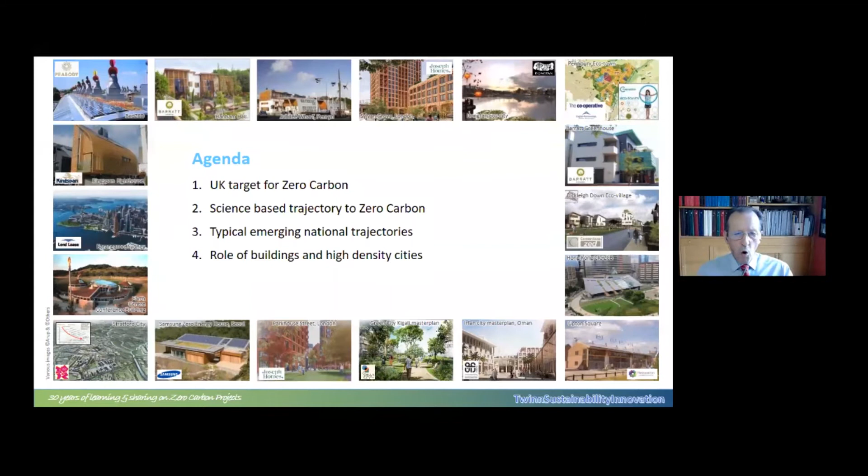So my background, it's 25 years since I started my first zero carbon buildings, and I've been involved ever since in various different kinds of zero carbon, and beginning more to look at embodied energy as well as operational energy. But for now, I'm going to be talking about the UK's trajectory, a science-based approach to how to get to zero carbon, looking at the sorts of policies which we've had to introduce, because it isn't just energy use, and then to focus on the role of buildings and high density cities, because there are many similarities between the likes of London and, for example, Hong Kong, but some very interesting subtle differences as well.

A lot of the work in the UK has been headlined by the Climate Change Committee, which is set up by government as an independent arm of government to look at scenarios as to how we reduce carbon emissions and make recommendations for policy. And the law is such that the government of the day has to formally respond to the Committee on Climate Change proposals. We have recently had what is called the 6th budget.

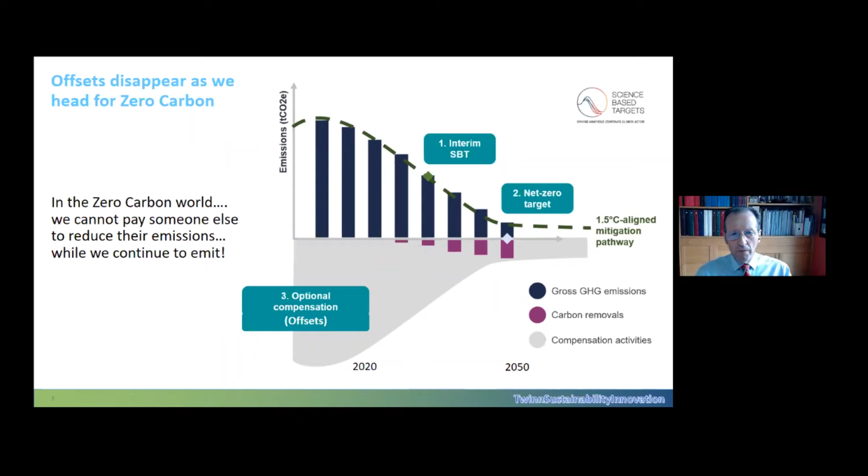And indeed, as every country starts to go zero carbon, they will be using their own sequestration towards their own targets. So at the moment, you find airlines offsetting their carbon because they're growing forests somewhere in a different country. But in reality, that country, when it goes zero carbon, will be looking at that carbon sequestration contribution towards their targets. So avoiding double accounting means we will lose offsets as we go towards zero carbon. We might be able to use them in the short term, but they will taper very quickly.

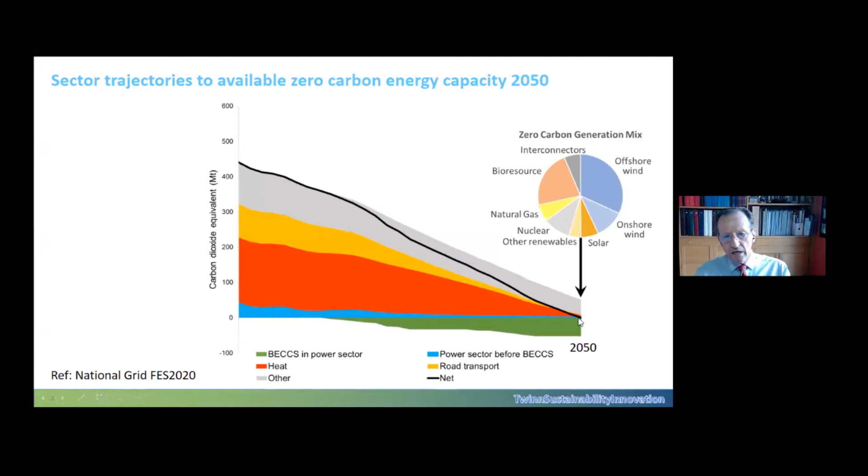We have an element of sequestration here, which offsets some of our grid production, particularly at peak. This is to be grown trees in the UK, so we're expanding our vegetation and looking at harvesting it and then locking in the carbon from emissions of combusting that. So we get a double benefit, and we'll probably for the next 50 years bury carbon emissions into old North Sea oil geology, which is currently now vacant. But you can see buildings, particularly in heat terms, and a lot of our electrical demand in the grey will need to curtail greatly by the time we get to 2050.

Large windows may give good daylight, but that does not end up in low energy use, particularly in lighting terms. We tend to find it gets very bright at the perimeter, and then it makes the interior look dark and gloomy. So we're finding that in reality, what happens is not what the modeling has in the past suggested. And our regulations are beginning to now have to change to try and address the fact that these buildings are gas guzzlers.

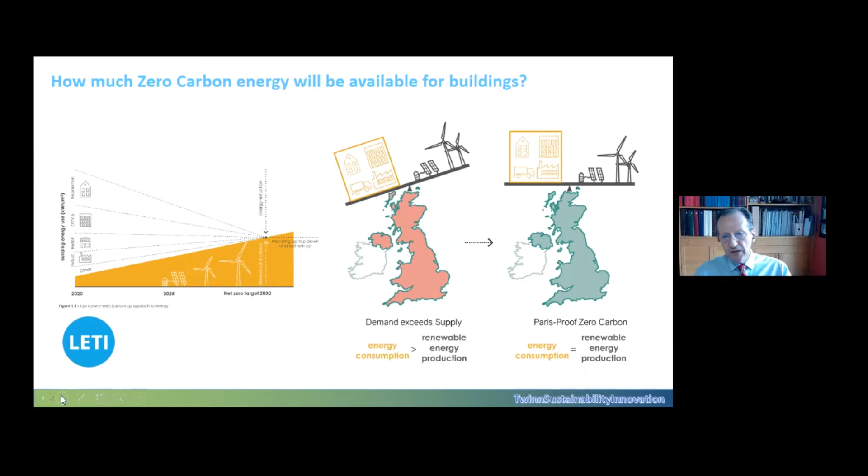RIBA is another of these organizations, so the Royal Institute of British Architects, which has been taking a lead, saying we're aiming for 2050, but actually for new build, we need to be looking at far shorter timescales, because we have a lot of existing building stock, which is the challenge in future. New build, we need to be focusing on zero carbon very quickly. And they have been setting targets, working with others, including LETI, including some of the supply side of the industry.

And we're now getting to the point where, for example, British Land, as one of our major developers in London, are saying all their future developments will be net zero carbon at completion. And this is because we're beginning to learn how we can do it, but also how we can reduce demand far faster than we have done in the past. And here are the sorts of trajectories we're looking at. And this isn't just prediction, this is measurement.

There's draft building regulations now being prepared and consultation completed, which are talking about introducing the first stage of you have to measure what your building is aiming to, its energy use, and publish it, so that you can then compare the predictions against the end result. Because to date, other than public buildings, most buildings never had to produce a certificate.

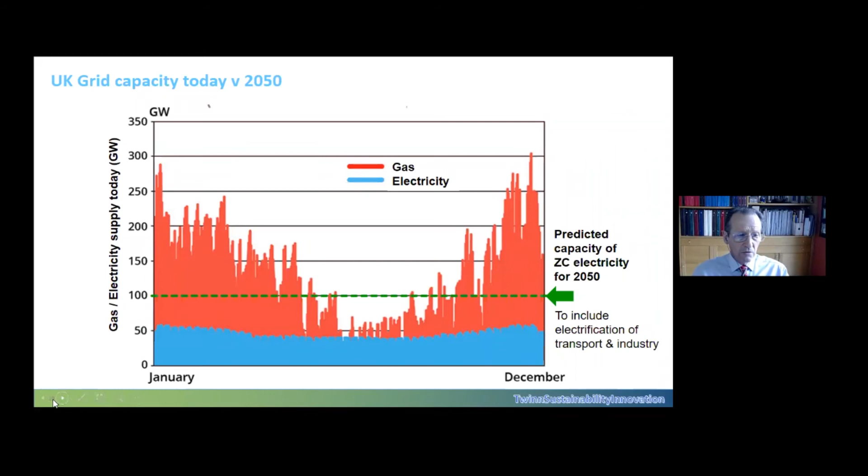Data disclosure is then the final part of this equation. Just because those big glass buildings in London got a compliance, yes, you satisfy the building regulations and here's the modeling, we found that that doesn't work. And this is where data disclosure becomes a critical part of the way forward. We have to be able to model more accurately. And the only way to model more accurately is to reconcile against the measured results of that construction before and after, and make sure the feedback goes back into the modeling.

And what we've tended to find, we've been far too optimistic in the modeling as to how efficiently things work, how systems, control systems work. Most of them don't work as intended, all of those things. And I think you'll hear a lot more in some of the subsequent lectures about disclosure, monitoring. Those landowners who have gone in and measured properly get a very different result when they then start to look at how they modify the operation of their buildings.

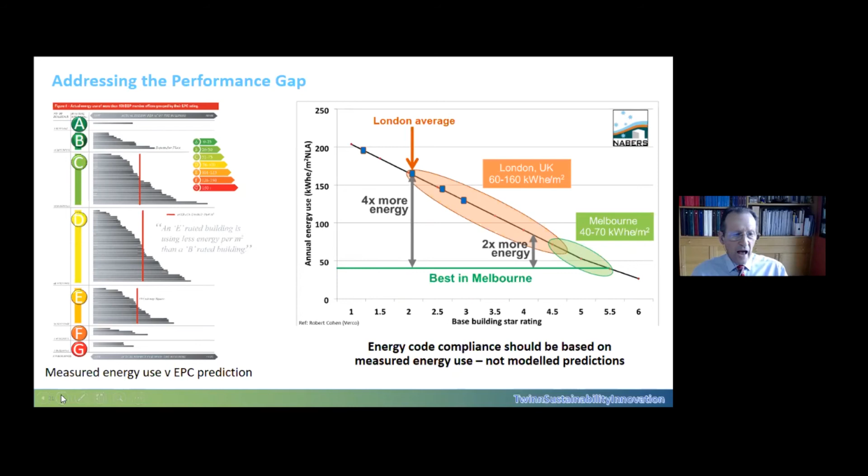On the right, we have feedback from, as I mentioned, NABERS in Australia, where the best in Melbourne of an office building with roughly the same climate as London is using a quarter of the energy that London's average is. In other words, we're using 4 times the best in Melbourne, and certainly more than twice the best in London compared with the best in Melbourne. These we have to learn from and accept, and then change the way we do things.

So what does this mean for building designs? I'm going to finish with a whole set of case studies which are currently being designed, approved, and have started construction in London. But I'll give you an idea. This is the sort of thing we're looking at. On the left is a typical building, full height glazing, fan coil units, cooling load not far off 130 watts a square meter for your systems. We are now looking at far more modest windows, as I said.

We're also looking at the IT. What NABERS in Australia identified, and separate research here, is we are not using anything like the computing power that most of the codes assume we are. And indeed, there are actually advantages in the software of feeding in high tenant loads because it makes your solar loads look smaller. So we found these unintended consequences in the modeling.

But if you go through, we're finding that, for example, if we use the new European standard for lighting in workplaces and look at the task lighting option, so this is 300 or 400 lux on the desk for 1 square meter out of 8 or 10 square meters, and the background lighting is at 150 lux, we're then looking at lighting which is halved. As I mentioned, the small power, the computers, going down, the solar load dramatically lower. And by the way, the sun angle's lower in the UK, so in mid-season we get higher solar gains than arguably you will get within Hong Kong.

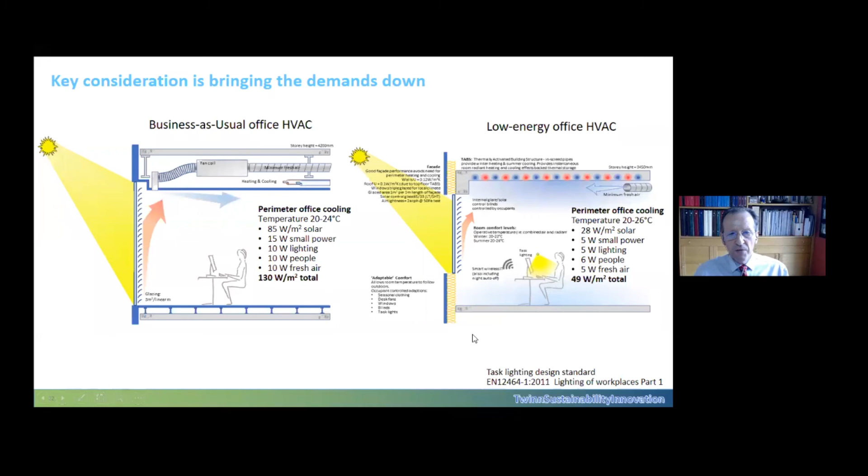We're also finding that we're getting rid of a lot of the kit. The costs of the building can come down. We're also finding the storey heights can come down because we haven't got these voids. We don't need the drop ceilings and so on, which tend to have very high embodied energy because they don't last that long. They certainly don't last the life of the aluminium, which a lot of them are made out of. And the cladding area has come down, so we can afford to put more investment into getting the shading and so on, right? So this is a little bit of a snapshot. It's not the only way of doing it, but it gives you an idea.

So a number of these little case study snapshots. This is a building going up near London Bridge; you can see the centre of the City of London there. The Thames is just going past between this building and those. So fairly large buildings, and we're looking at 55 kilowatt hours per meter squared, which is about 55% better than our current building regulations. And it's what we're calling Paris-proof zero carbon.

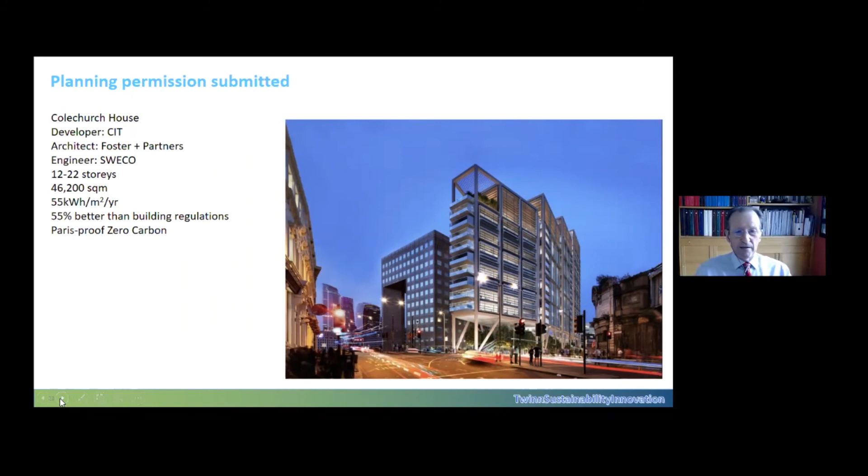In other words, if we can bring the loads right down to these levels, we know that as the grid decarbonizes, we will get to a point where the grid will have enough capacity to serve that building 100% with zero carbon electricity. And so we're looking ahead to where the grid is decarbonized, but of a limited capacity, and we are future proofing for that eventuality. This building, in fact, has a fair amount of PV on it, and it's used in the shading. It tends to be the more costly way of achieving these, but cities always seem to have a certain proportion of buildings where more money gets spent on them than others.

This is a more pragmatic approach. Underneath this is Southwark Tube Station, the underground. You all know only too well over-station developments, of which you in Hong Kong are experts. But this is a new building where once again you can see this number coming up, 55 kilowatt hours per meter squared, 17 storeys. This one's also doing 40% less embodied carbon. There's a fair amount of timber going into this building, structural timber, and they're reducing the amount of concrete going into the building.

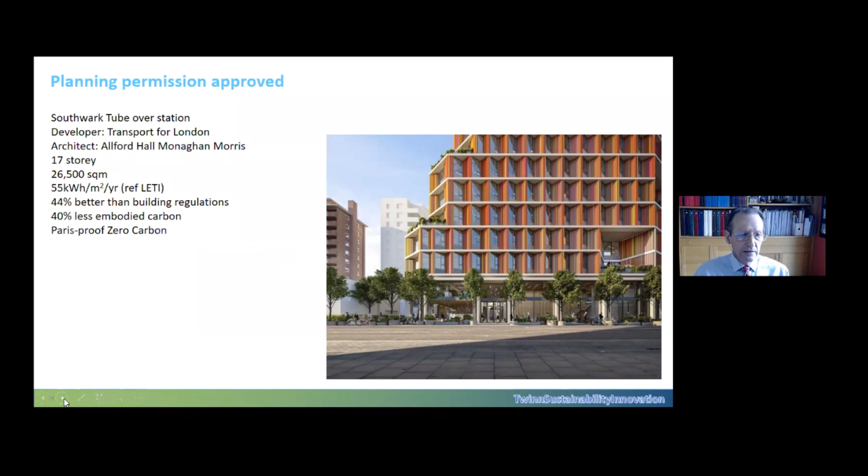This one, a 20-story tower, which had planning approval a year or so back. This one is 75% better than the building regulations. And this is going for 35 kilowatt hours per meter squared, including the tenants. And here is the sort of systems we're looking at inside the building.

We're looking at what used to be called in the 1980s a Versatemp condenser circuit system. That just means the temperature it's working at. And what we're looking at is temperatures in the water between 15 and 28. And we can then, when we're cooling an area, put heat back into the pipework. A heat pump can then heat that up to generate hot water. So you can often get a balance in your buildings.

And then the rooftop air source heat pumps do the topping up. And we're finding the north side of the building may need some heating and the cooling on the south side. And we're putting it via the concrete, so we've got that thermal inertia in the building. And we can then turn off that plant for the peak hours because there's 2 or 3 hours of thermal inertia within the building.

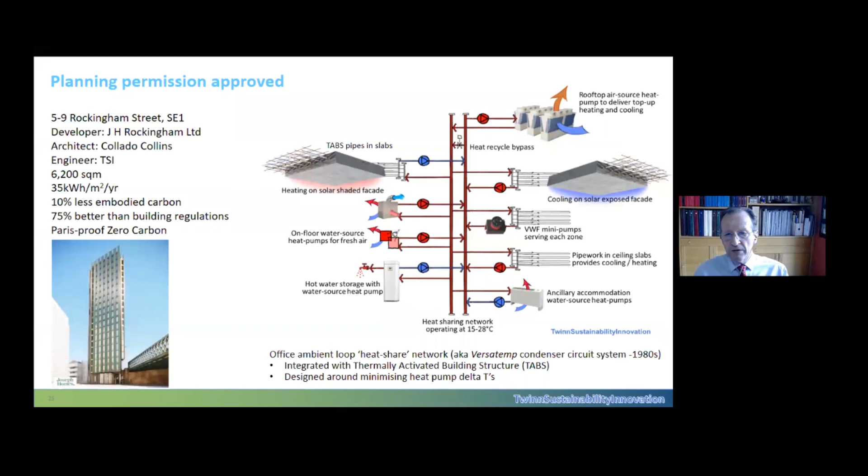This is another one. Here, once again, 75 kilowatts. They haven't got quite so far, but we're on this learning curve as developers begin to realize how far we can go. This one's particularly interesting, and I've included it because of its construction. It has changed fundamentally how we construct buildings.

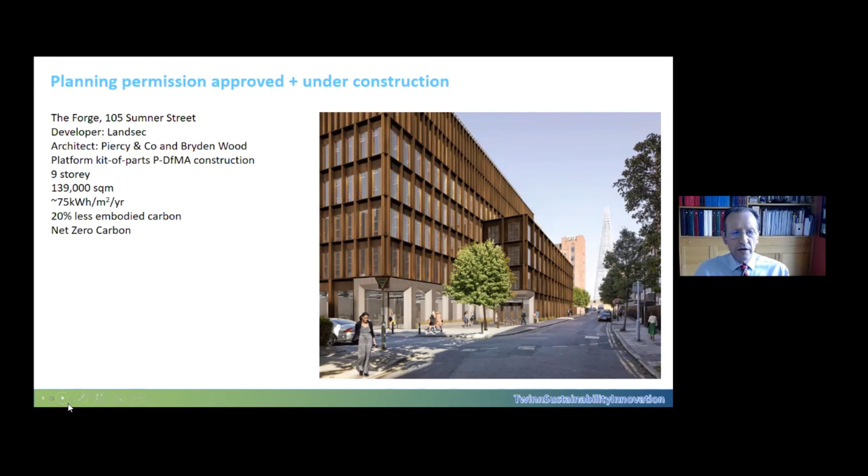So there's a lot less concrete going in on site. There's a steel frame with concrete poured simply into the permanent formwork, but all of it is kit parts so that you reduce the amount of material used and you reduce the embodied energy in the building. This one will be a very interesting building when we see it completed. It's now on site being assembled.

This is what we're also beginning to see. This is an existing building, which is now being totally refurbished and is going to be reclad. It's now going on to site. This is British Telecom's old headquarters, very close to St. Paul's, which is just to the right.

And the system has been completely reclad, but it reuses all the existing structure and therefore has a very low embodied energy. The targets they're looking at are not quite Paris proof for the whole building, but they're looking at Paris proof for the base build section, because some developers are not yet confident they can convince their occupants to lower their energy. And that's one of the things which has been very interesting about the shift to zero carbon the government made in the UK.

Psychologically, before that, when we were going to 80%, a lot of people thought, oh, well, I'll be in the 20%. I won't have to do much. Other people will do it. But what we found is once you say everybody has to do it, tenants are beginning to say, well, I need to do this because my funders and my supply chain are beginning to look. If I want staff, youngsters who were out on the streets complaining about climate change, the Extinction Rebellion, they are looking for companies which now have good credentials in carbon and energy terms.

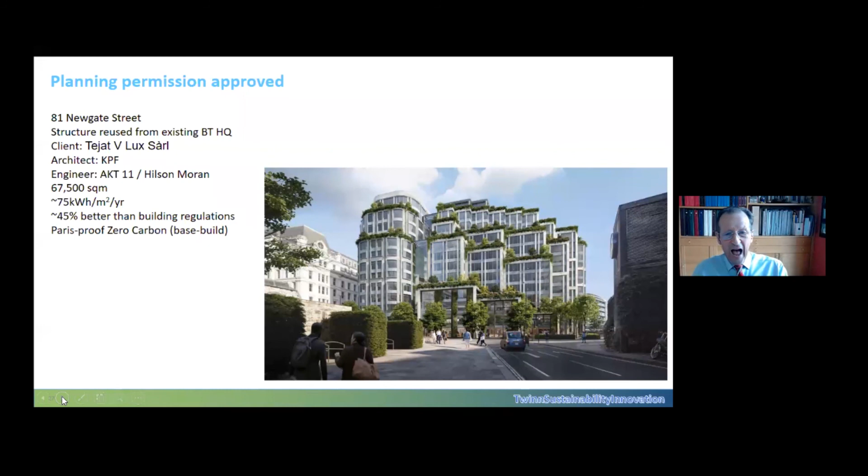So the developers are beginning to find that their tenants are asking them how good the carbon of their building is. But developers are also finding new influences. Their funders, the pension funds, all of those funders upstream are now thinking, what's this asset going to be worth in 25 years? If it is a gas guzzler giving out all this carbon, if we have high peak electrical demands and therefore the energy bills are high, we may not be able to occupy it. What's the value of that building going to be in 25 years? And developers are beginning to say, well, actually, I need to anticipate this. I need to be showing I'm the best in the market and attracting that kind of money.